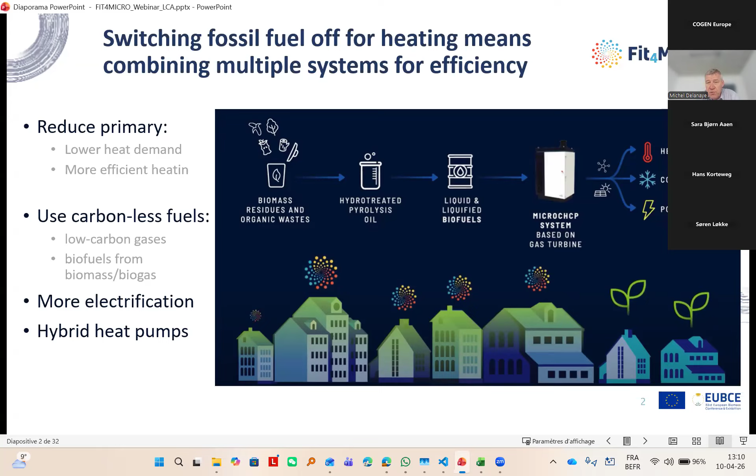And so with the micro CHP system, or CHCP, because it can also do cooling, we can do heating, we can do cooling, but we can also do power. And so that's how we want to greenify our buildings.

So the project started in 2022. It has been lasting for 48 months, so it's almost finished, closing in September this year. A budget of 5 million euro, and it's a research and innovation action, aggregating in the very beginning 9 partners, now 8 because one actually left. We are the coordinator, Mitis.

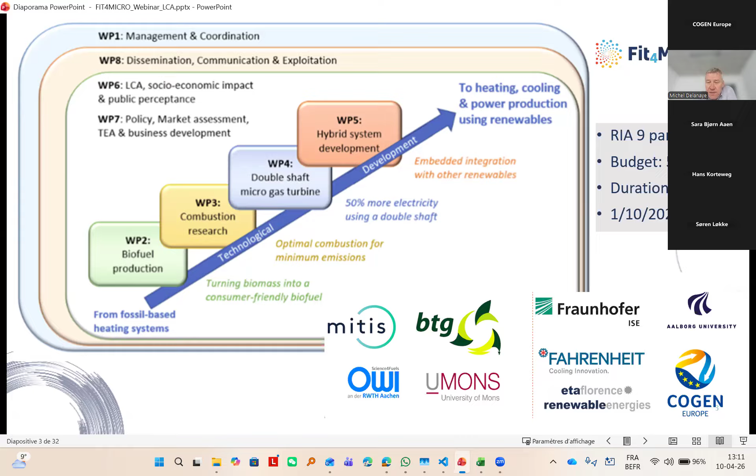We have other SMEs like BTG inside of the project. We have a large institute like Fraunhofer, universities like Aalborg University, University of Mons, and smaller research centers like OWI, which is affiliated to RWTH Aachen. Cogen Europe is part of the project as well, and ETA is taking care of dissemination of the project. So we have a structure which is relatively classical for European projects, where we have management and coordination, surrounded by dissemination, communication, and exploitation, and the activity today is part of this WP8.

We have technical work packages, and I will be mostly focusing on them today, from work package 2 to work package 5. And we have also life cycle analysis and the economic impact of the project, together with outlook in policy and market, and also what we can do actually to penetrate the market with this system.

If we go to the technical work packages, we have one focused on biofuel, one focused on very clean combustion, one which is more on the microgas turbine, and the rest is focusing more on a system level. I structured my presentation, which is highly technical, on 4 main innovations, or main developments we have carried out in the project.

So one of them is the development of a novel thermodynamic cycle for the microgas turbine, which combines intercooling, multi-combustion staging, and also humidification of the cycle. So I will talk about it.

We have a second innovation which is mostly focused on flameless combustion, which is a special combustion regime where we can achieve very low NOx, which is also a greenhouse gas, and which is very versatile in the sense of the capacity to burn different kinds of fuel. And it actually is quite interesting for burning this biofuel, which is also quite special.

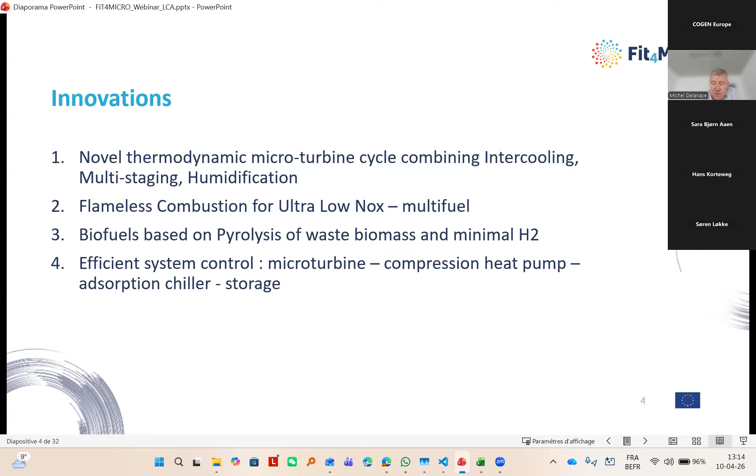And the last innovation is the coupling of our microgas turbine system together with heat pumps, vapor compression heat pump, but also adsorption chiller to broaden basically the usage of the microgas turbine, and storage, and to see what kind of building actually can be interesting for that kind of system. So my presentation will be focusing a little bit on the 4, giving you some synopsis without going into too much detail.

So before entering into these innovations, just have a look at what we are trying to achieve, which is this combined system. We are combining a gas turbine, which is this block called MGT. We always have some sort of backup boiler because it's sometimes difficult to meet the heat demand in very cold weather, which sometimes appears only a couple of days in the year. So this MGT and backup boiler will use the biofuel.

In the system, we also bring electricity coming from PVs in good weather. We, of course, can also be connected to the grid, or we could be off-grid. And we use the MGT to produce electricity. So this is where you have this purple line there, injected into the bus of the building. But also heat. Heat can be used for domestic hot water, and also for heating, obviously. That's why we can store it.

And the heat can be either directly provided to the building in order to do heating, but also, for example, to an adsorption chiller in the summer, or where we need cooling, in order to produce cooling from the heat. That obviously will broaden the range of application of the microgas turbine.

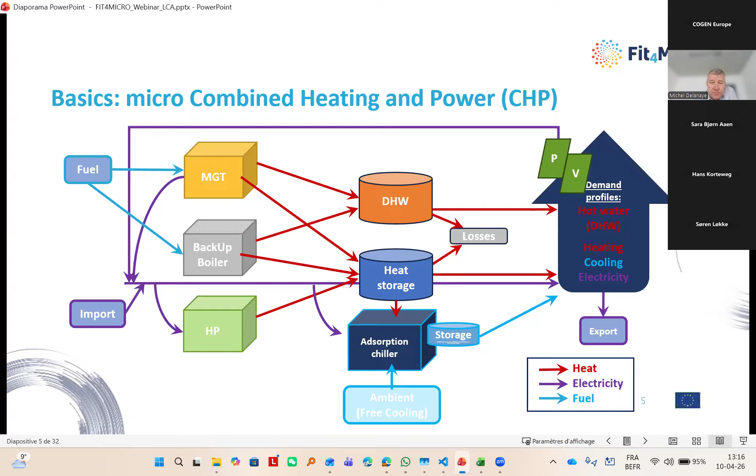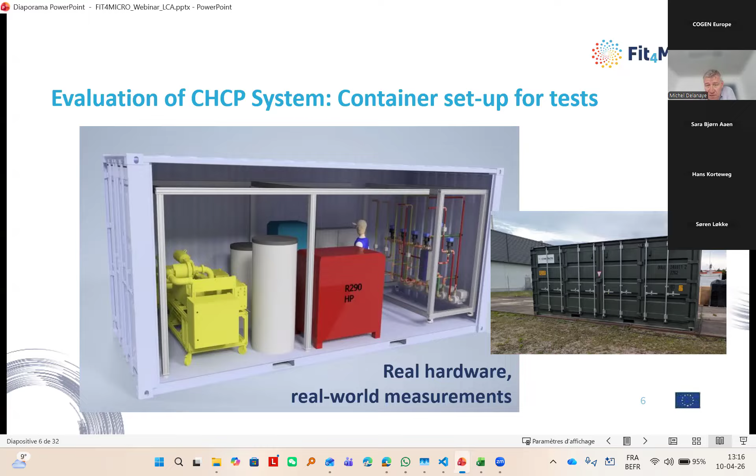So at the end of the project, we want to reach TRL5, and the TRL5 is basically a container, so that's not very nice because it's closed. But in that container, you have all the systems: the microgas turbine, heat storage, vapor compression, adsorption chiller, and the distribution of the different energy. And we will be testing this. It's going to be ready very soon, and everything will be tested together.

So let's focus on the first innovation, which is this novel thermodynamic cycle. A gas turbine is something which is quite nice from the CHP point of view. So that's a basic recuperated Brayton cycle.

We have electricity, let's say, in the range of 30% of efficiency. And all the heat basically can be withdrawn from the economizer here in the cycle after the recuperator to produce, let's say, the heat that will be used by the building one way or another, or by the adsorption chiller. And you can certainly reach at least 80% efficiency overall, even more, perhaps 90-95% efficiency, depending on the way we actually do it. So the microgas turbine has this advantage of relatively high output temperature. So it can be used indeed to produce hot water, could be used also for steam or for some other stuff.

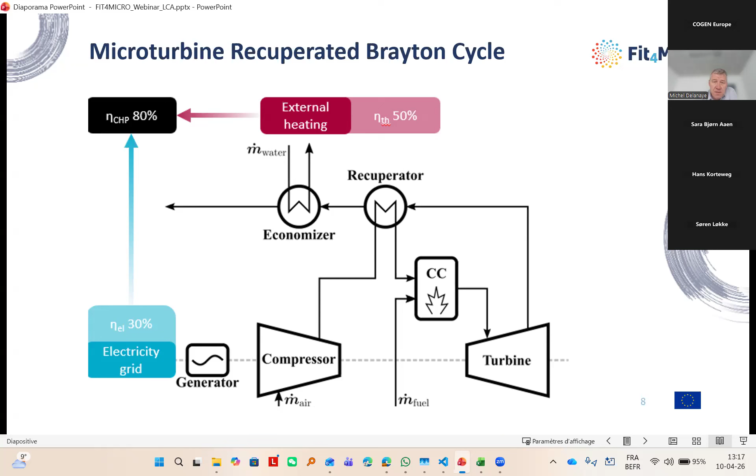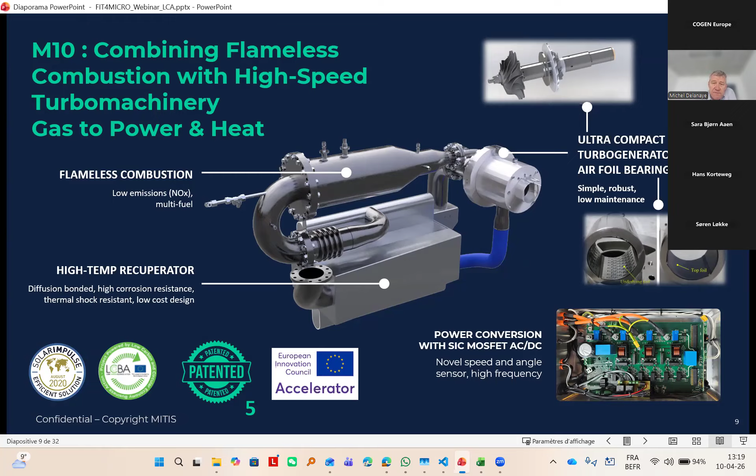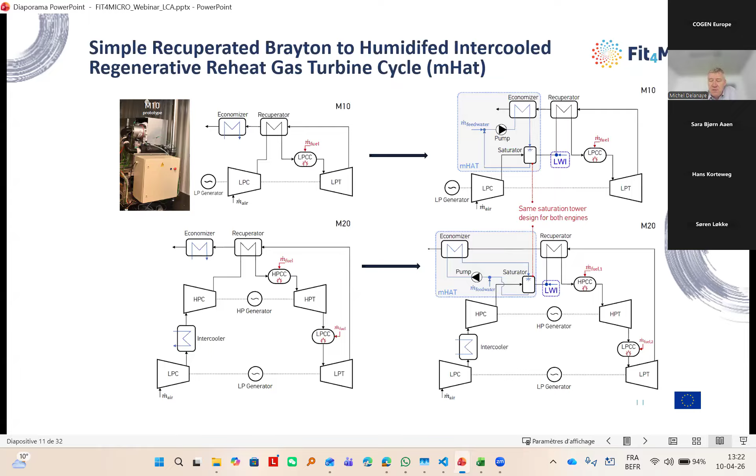So we can do it on the simple cycle, typically the M10 machine, or we can do it the same way on the Micro 20 machine here after the high pressure compression. And because you are at higher pressure, it's a little bit better, in fact. And that's what we saw in all the analysis that we have performed. If we take the M20, so this two-stage machine here, we can get an improvement of electrical efficiency which is significant, 8.4%. If we do direct injection, 6.5%.

And basically, with respect to the M10, we were 6%. So we are increasing from the M10 already the efficiency 6%. So you have 0.4 improvement and about 2.3% by using the micro HAT. The M10 is here, let's say it's the basics. If we do injection, we get a little bit more, and micro HAT, we get also 1.3% improvement of efficiency.

Initially, we were all focusing on the micro HAT because this is the best. But at the end, what we see is it's also very complicated to implement. So that's the saturation tower, which for a small machine, from a cost point of view, is probably quite difficult to, let's say, imagine. Direct injection of water is already interesting and can already allow a gain.

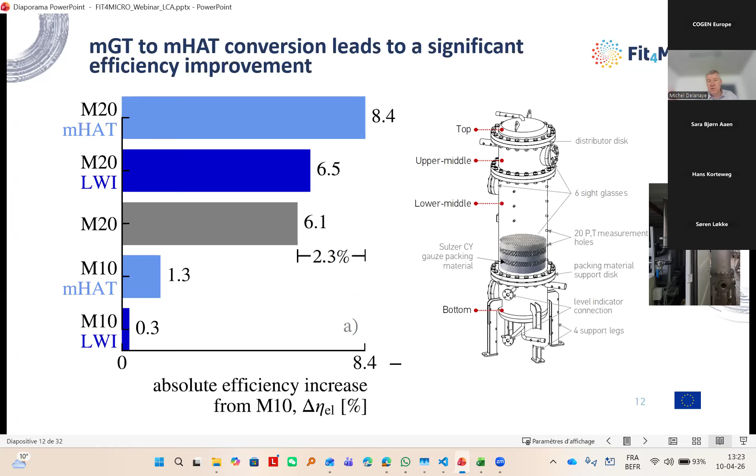So that's the improvement with respect to the basic single recuperated cycle. With this two-stage micro HAT humidified, you can get 8.4 improvement, which is typically from a 30% cycle of gas turbine, simple recuperated, you could get to 38%, which is really significant.

What about flameless combustion? That's our second big activity in the project. And what is it? Flameless combustion is quite interesting in terms of the name, because usually you think about combustion with a flame. And indeed, in conventional combustion, lean premix combustion for example, you would see a blue flame, which is produced by the radiating hydrocarbon radicals.

When you go to flameless, it's quite funny because at the end you don't see anything. And you think that your combustor is not burning, but it's still very much burning. But you are in a regime of combustion where basically your temperature has decreased significantly. Your temperature decreases, your combustion efficiency increases, and your pollutants are decreasing.

So you think it's the miracle combustor. True, in some way it's a miracle. It has also its drawbacks. For example, it's quite big because you need heavy recirculation of the flue gas inside the combustor.

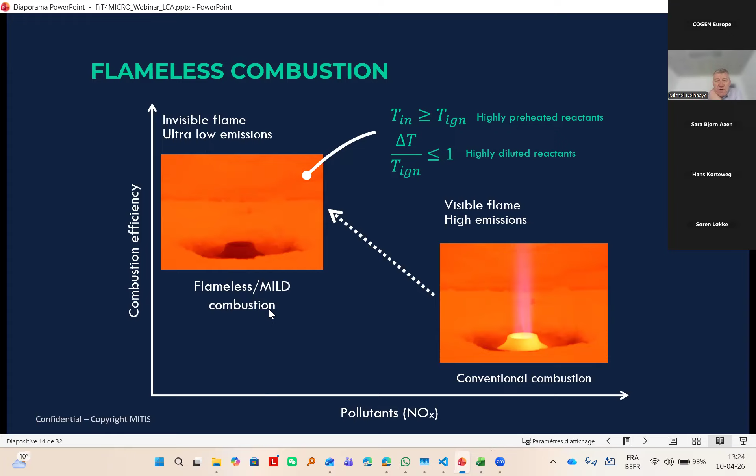The MITIS flameless combustor looks like this. If you would have a lean premix combustor, it would be half of the size. Here it's a bigger size, but it has this advantage of very low NOx and also the capacity of burning everything. So in this combustor, we are injecting gas, or fuel, in the middle here. If it's liquid fuel, you have an atomizer.

And then air is injected through this injector here. We inject with a certain speed in such a way that we have high recirculation of the flow. We basically detach the flame. There's no flame; combustion takes place here. And thanks to the big recirculation, we have self-ignition of the mixture, and then it goes out like this, remixes, and goes to the turbine.

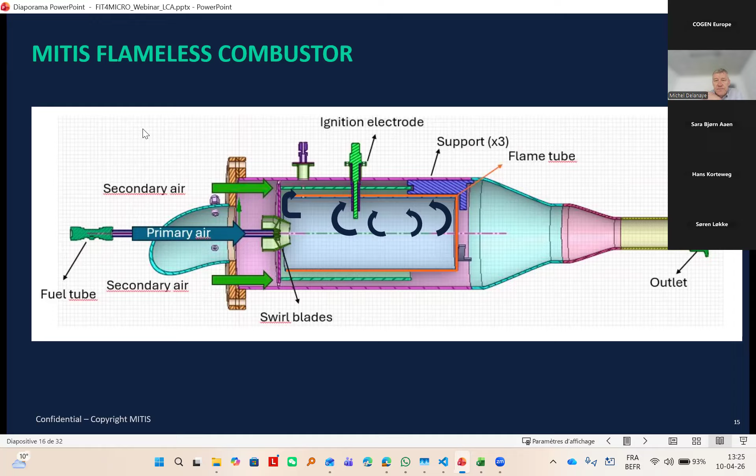So that's a little snapshot. We do a lot of simulation of this. That's a basic axisymmetric simulation where you can see the temperature in the back of the combustor, the flame tube, where we have also the OH radicals. OH radicals are a very good marker of where the combustion is taking place. If you had a flame, you would see OH here.

No flame, you have OH in this region, and the temperature of the mixture here is no more than 1400 degrees C. Whereas if you have a lean premix, for example, you will reach 2200 degrees C in the flame, and then you will have onset of NOx.

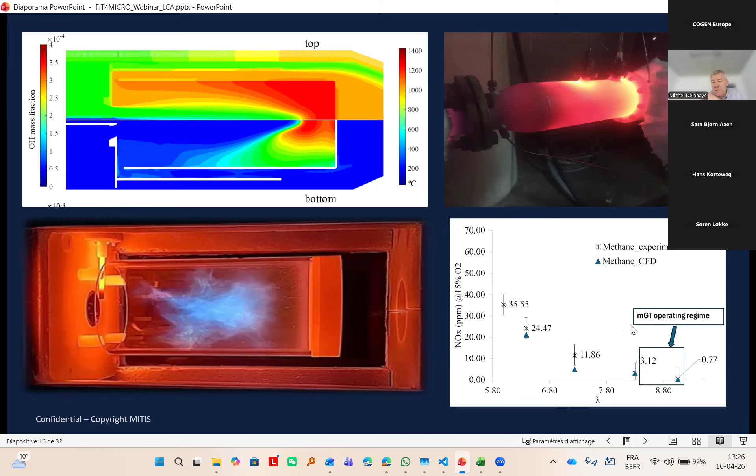That's a CFD simulation, for example, of methane combustion compared to experiments, and we can go as low as 3 ppm or even lower in the regime where the combustor is operating. So we have been working on this flameless combustor and improving it for biofuel. Biofuels which are made using pyrolysis of residues and minimal ingress of hydrogen.

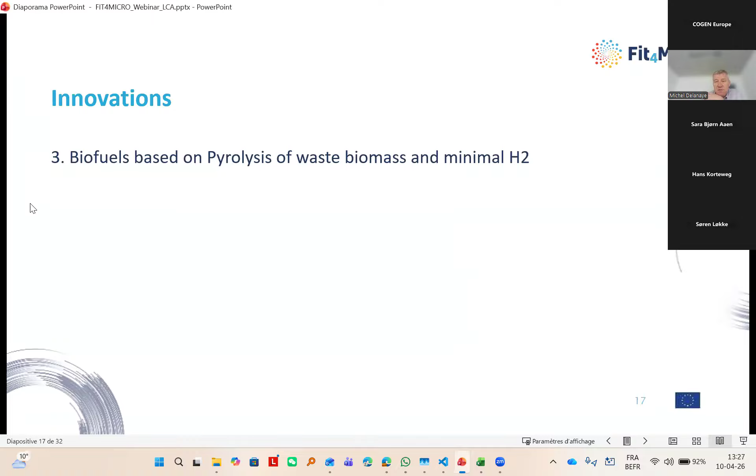Just to give a word, this is developed by a company called BTG. The principle is that you have biomass coming into a reactor where you have very hot sand, producing gas. Gas is condensed. Some of the flue gas is used to burn and create the heat for the reactor to work. Yeah, I have an animation here.

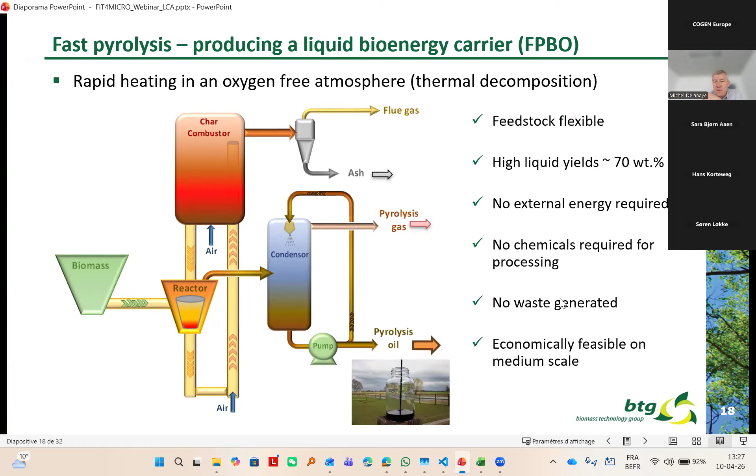And then we get the pyrolysis gas and pyrolysis oil. The pyrolysis oil is some sort of a syrup which still contains a lot of oxygen. So it's not very stable, but it contains most of the energy from the original biomass. This process can reach about 70% of all the energy that you had initially in your residues.

So that's how it looks like, this fast pyrolysis bio oil called FPBO. It has a relatively low LHV, so 16 megajoule per kilo compared to natural gas, which is 50 megajoule per kilo, something like this. You have also some residues and so on that you don't really like.

And usually what they do, they take it directly to the refineries. Actually, they mix it with crude oil and then they make the product. But we can make something else out of it.

So we can improve it by hydrotreatment, which means we inject hydrogen, remove oxygen, stabilize it, and at the end you get an LHV which is at the end of the range of 40 megajoule per kilo. And let's say your residues that you have inside now are very, very low.

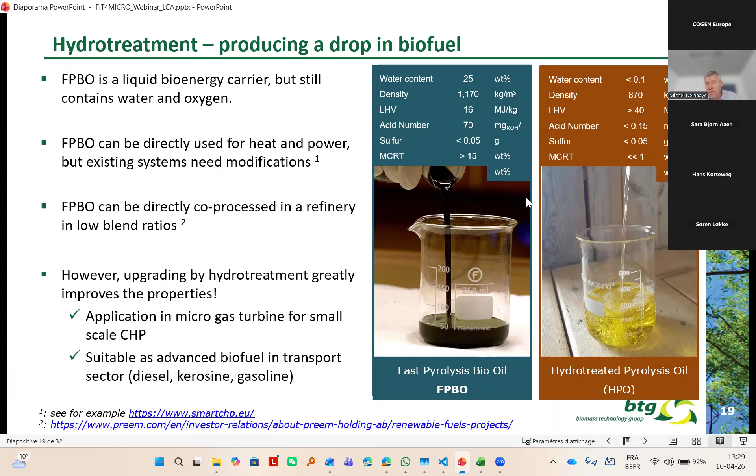So that is already some sort of fuel you can use. Usually from this they could directly create biodiesel, biokerosene, or biogasoline. In the project, the idea is to use this HPO with the least amount of hydrogen, because hydrogen is very costly. So the cost of your fuel will become higher if you use more hydrogen.

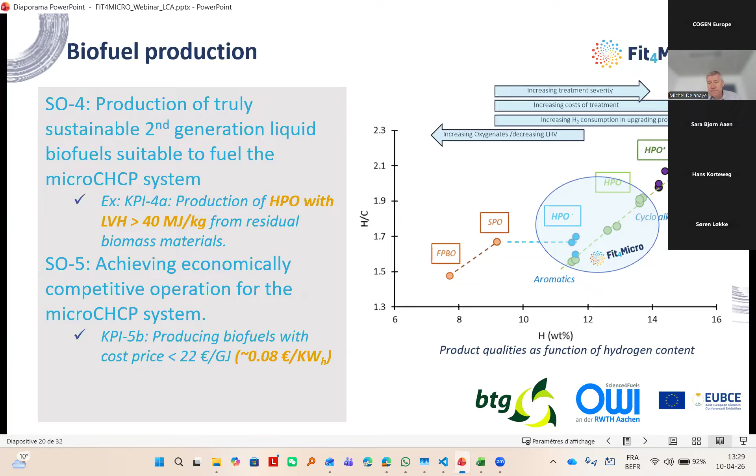And CO2 and O2 and CO in general is a little bit more difficult to predict. So simulation under-predicts, let's say, or gives too much CO compared to what we have in experiments. But actually pyrolysis oil burns very well into our combustor without quasi no modifications to the combustor.

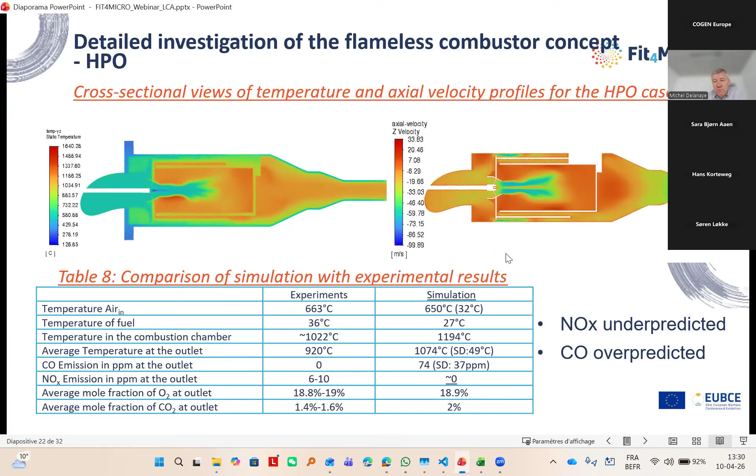So OWI has been installing, I would say, a sophisticated test bench to test the high pressure combustor, because when we go to higher pressure, 7 bar into the cycle, that's something which is a bit unknown to us.

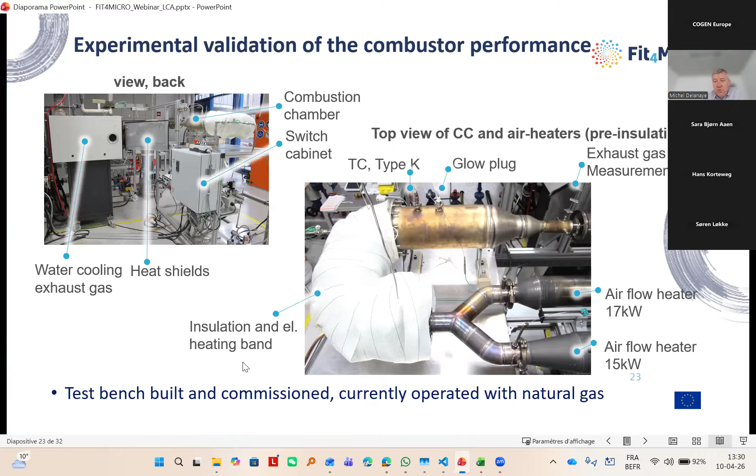Quasi independently of the grade of HPO. And so the grade means more hydrogen, more treatment, or more cost for the HPO. The combustor is actually behaving very well, reaching low NOx, burning, no problem.

And compared to domestic heating oil, which is a little bit our reference, which is the black one, it's actually working even better than domestic heating oil. So it means after all these campaigns of testing and so on, we are very confident that we can use liquid biofuel directly into our flameless combustor, the low pressure one and the high pressure one as well.

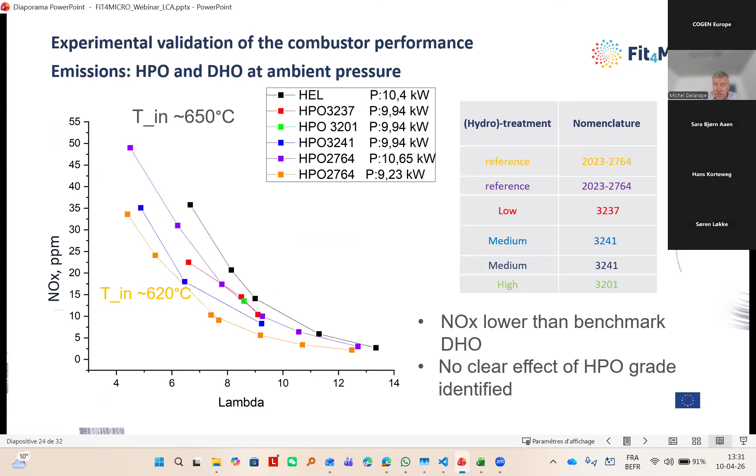Now, the rest of the project was focused on combining everything together. So combining compression, vapor compression heat pump, adsorption chiller, storage, the micro turbine. First of all, look at, okay, where can we apply it? What kind of building? And then afterwards also to control it. How can we optimize the system?

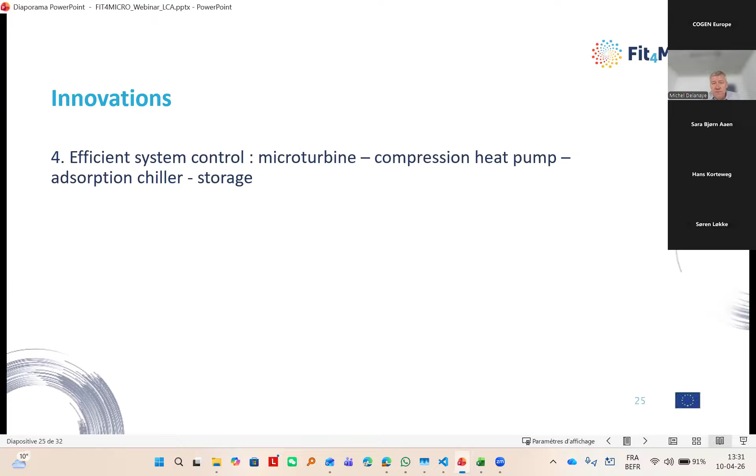So Fraunhofer has been developing an Excel sheet. One first thing was called a static calculation, which is an Excel sheet which contains all the thermodynamics of the different components, and where we can simulate on an hour basis, basically how much electricity is produced, how much heat can be taken or consumed by the building, etc. So optimizing the whole system.

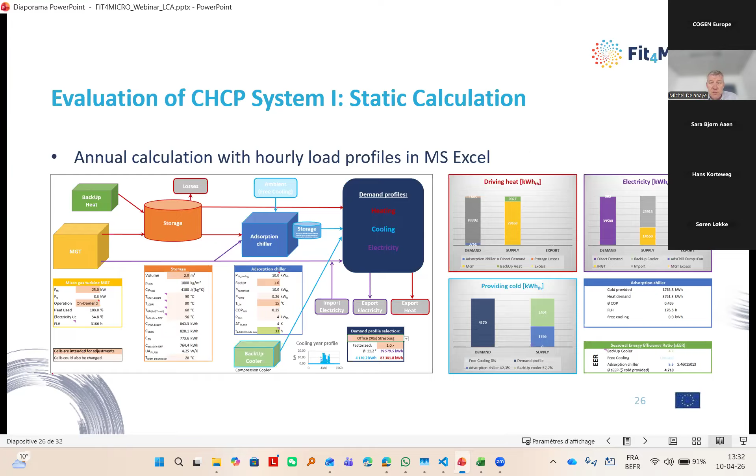And at the end, you get nice graphics actually, which show you how many hours basically your micro gas turbine will operate, because there's no point buying a gas turbine if at the end actually it doesn't run. So that's the basic thing.

So one of the applications, for example, was an SME in an industry building, where they actually need some cooling. So they use adsorption chillers, but at the same time, they also need the heating of the building and the domestic hot water. And it's located in the north because there, I mean, you need some heating. So they compare different combinations.

So that's our machine, the combined heat and cooling power machine, together with a small compression chiller in order to have some backup in case there is a problem, and free cooling modes, compared to the usual practice, which is a compression chiller alone.

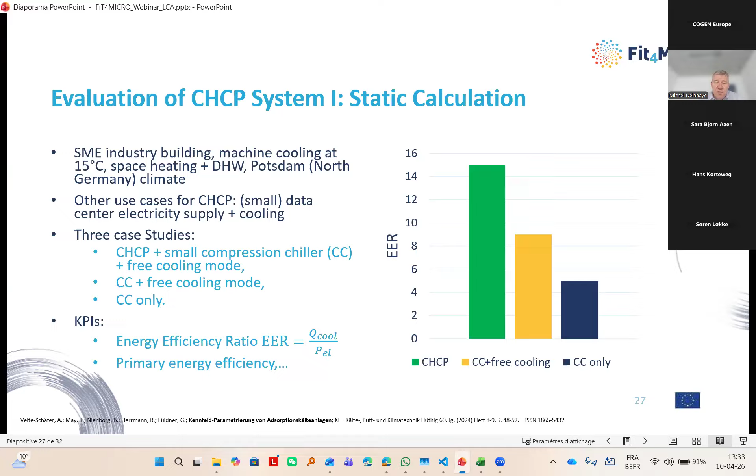And so the idea is to look at energy efficiency, which is basically how much cooling is produced with respect to how much electricity. And you can see, for example, by running this Excel sheet, we can see that we can in fact be very good in terms of primary energy consumption.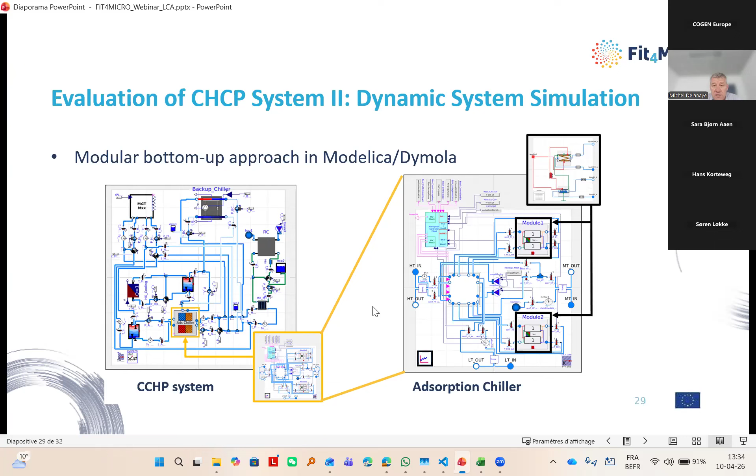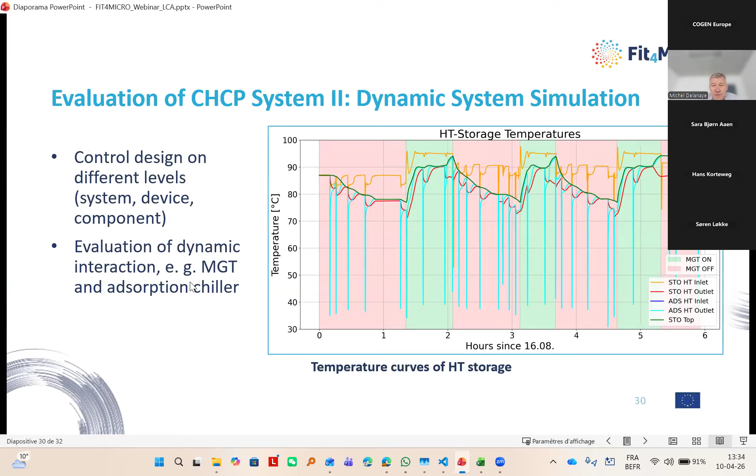Another modeling we are doing is a full dynamic system simulation. With Dymola Modelica, we're actually simulating the whole system and its dynamics. For example, the adsorption chiller is represented by a sub-Dymola model, and the MGT also has its own Modelica system. So we can simulate completely in a much more transient and detailed way, and instead of going by day, now we go by hour, or even lower. We can simulate the system and see its applicability to a particular dynamic supply of energy.

In conclusion, we are reaching the final line of our project. We had very good, very interesting interaction between the consortium members and partners, with a lot of good collaborations. We were able to improve the fast pyrolysis process to use low-grade materials and residues, which is very important to decrease the cost and to minimize the amount of hydrogen used.

We demonstrated flameless combustion with very low NOx for the hydrotreated pyrolysis oil biofuels. We implemented the novel cycle with airfoil bearings, microgas turbine, and flameless combustion with humidification as well, and did all the coupling. We also improved adsorption chillers—Fraunhofer has been working on this. Now we have a complete combination of all the systems together that we are able to control using efficient transient models. Thank you very much for your attention.

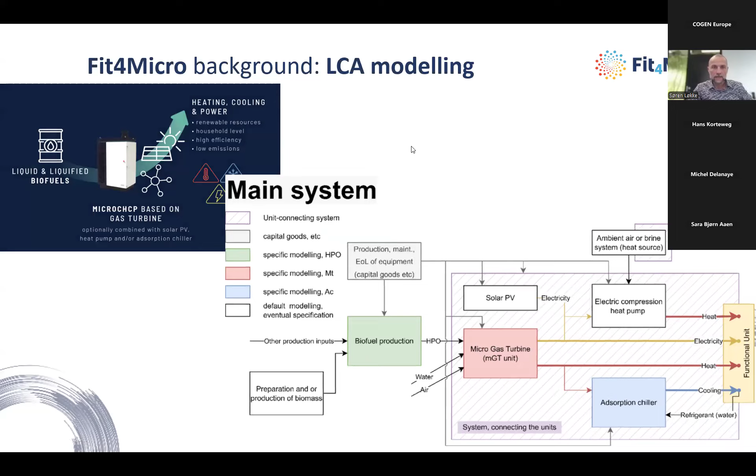So basically, what Michel has been presenting is what we are putting into the life cycle modeling. What we have here is the main system that we are modeling: the biofuel production down here, the actual technology system with the microgas turbine, the adsorption chiller, and the different outputs in the combined system here. So this is what we are modeling in the system.

In terms of the feedstocks, what we present here are three feedstock scenarios: forest residues, contaminated wood, and wheat straws, as different types of waste biomass resources that can be put into the biofuel production.

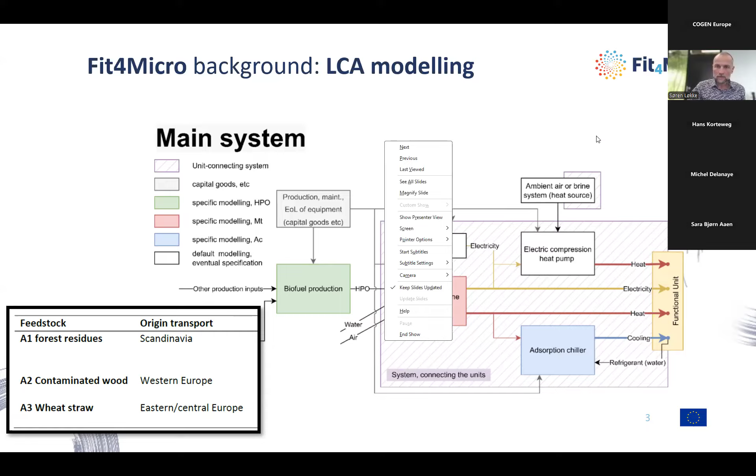And then, based on the work from Fraunhofer, we are putting this technology system into different specific geographical and building use-case-wise use contexts. This is pretty important because one might think that the environmental performance of a system like this integrated microgas turbine system works the same way everywhere, and of course it does in some sense, but its environmental performance depends very much on these contextual factors—how or where the system is being integrated. This is extremely central.

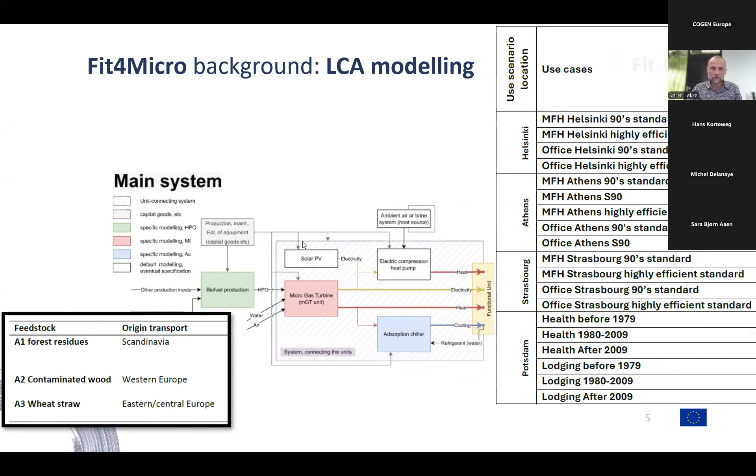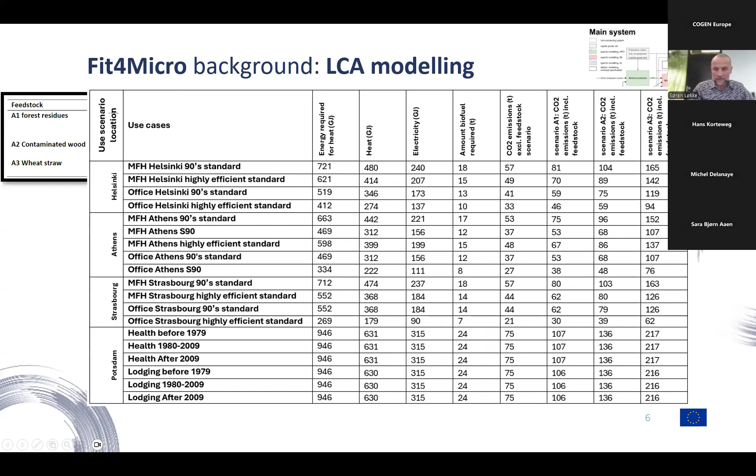When we take a Scandinavian system background like Helsinki, or a Northern European one like Potsdam, we can see that emissions may be slightly higher compared to a system where we're looking into a Southern European context. The main point we can take from this is that the choice of feedstock can be very decisive.

When we compare the microgas turbine system's climate performance with alternative performance, we find that forest residues, and especially contaminated wood, can achieve net negative emission profiles, while other resources, even though they might be quite competitive to a default fossil fuel-based energy supply to housing, may still contribute a net positive emission profile. So the system context matters a lot.

We've been able to extract and show this clearly using a consequential life cycle assessment methodology, where we're not only looking into the combustion emissions, but also very much into the alternative feedstock uses and substitution effects. This means, for instance, that if you're using a bio-based feedstock, the alternative would be fed into local district heating supply, and the alternative heating supply that the taking of the biomass induces could be coal-based. Then using this bio-based feedstock locally might be quite problematic.

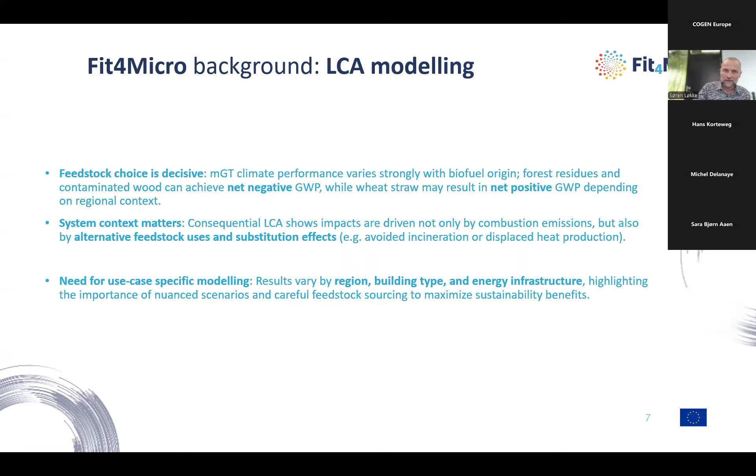Thanks. I'm looking forward to hearing the questions that I guess will arise.

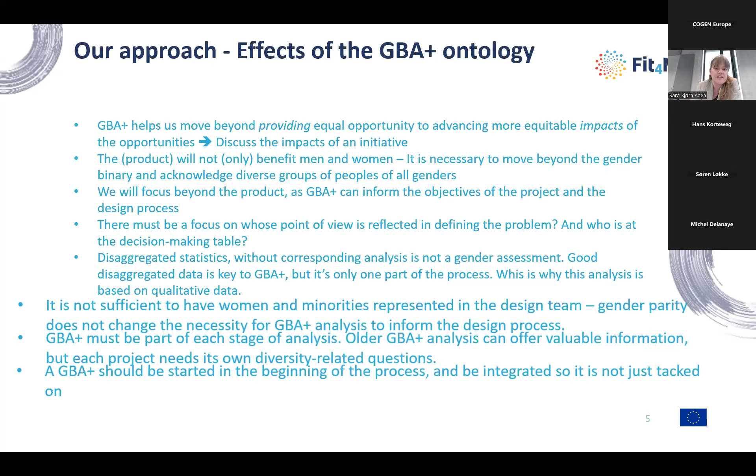And that was a very interesting workshop we had in Liège a couple of years ago, where I listed a long list of questions for the participants. And they could pick whatever they found useful and relevant related to the different stages of the design process, and related to different elements of understanding gender attentions. So I'm going to present to you now the most important results from these discussions. So this is related to the very specific technology that we are talking about today.

So one that was pointed out by the participants is that related to the form and function and service experience, so the very inner core of the technology, something that should and could be considered is the noise levels of the technology. What we know is that when we talk about gender plus, specifically age in this particular instance, we perceive and experience noise very differently. So young children and children in general experience noise more severely than adults do. Maybe intuitively it makes sense because they have better hearing.

So noise level is something that's considered, and maybe an effect of that, or a solution, it was discussed that we need flexibility when it comes to shielding for noise according to where it's implemented. Here you could have implementation in a kindergarten versus a regular residential building or school or wherever.

Another element that we discussed was the temperature. And this is also a case of needing flexibility. What we know from research is that men and women experience comfort temperatures, or temperature in general, differently. So we have different comfort temperatures. Women have higher comfort temperatures compared to men.

And the effect of that is that in the summertime, especially where you use the cooling element of the technology, women will feel it colder than men. So this is also a case where we need flexibility in temperature levels, and we need to be able to make different solutions for different users.

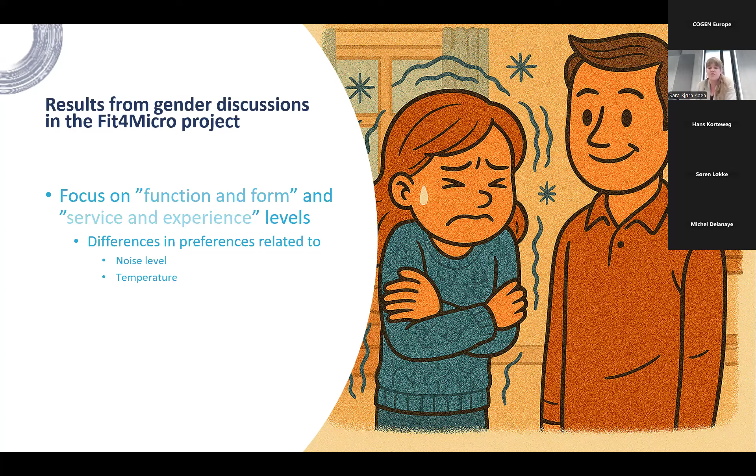Then our fourth one is that we see risk perceptions related to use of new technology, in this case the HPO biofuel, are different according to age. So the older you get, the higher you perceive risk compared to younger people. So this is not relevant in the specific design process, but it is relevant when you are communicating about how to implement this technology. You need to cater to risk perceptions by different recipients.

So throughout these discussions related to function and form and service and experience of the technology, what we landed on at a general level is that you need to understand diversity and you need to be flexible, particularly when implementing this technology, in order to make it inclusive for different genders and social categories. And of course, implementation speaks back to the development of the technology. So you can't implement something flexibly if it's not flexible at the onset. So that's why it's relevant for the design process as well.

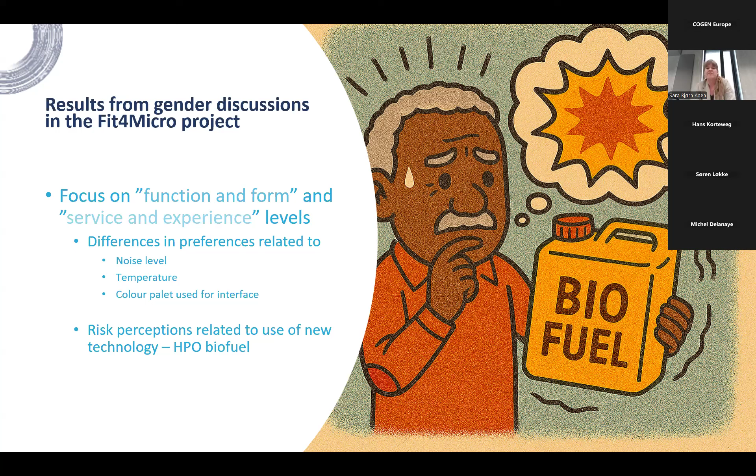Further results from the discussions with the consortium were related to an outer layer of the system, related to systems and infrastructures. And here a result that we discussed was that the weight of spare parts, for example, or the refueling elements, canisters or whatever you use to refuel, can create barriers for maintenance personnel who are slightly built, or disabled persons.

When you assemble or service or change, you need different spare parts for the micro engine, so how big can you make them? And are you creating barriers for people to service this technology if you make them too big? This could be something to consider. The second one is that communication and marketing is important when catering to different ways of thinking.

So what we see, and I'll return to this at a later point, is that men in particular are more prevalent when taking energy-related decisions or energy technology-related decisions, and women are less so. So that's a question of how you market. If you market this in the usual way, then what we will see, I expect, is that it will be men taking decisions related to whether or not to implement or buy this kind of technologies. So how can that be addressed in the way you communicate and market this technology as a way to level out the decision-making participation across the genders?

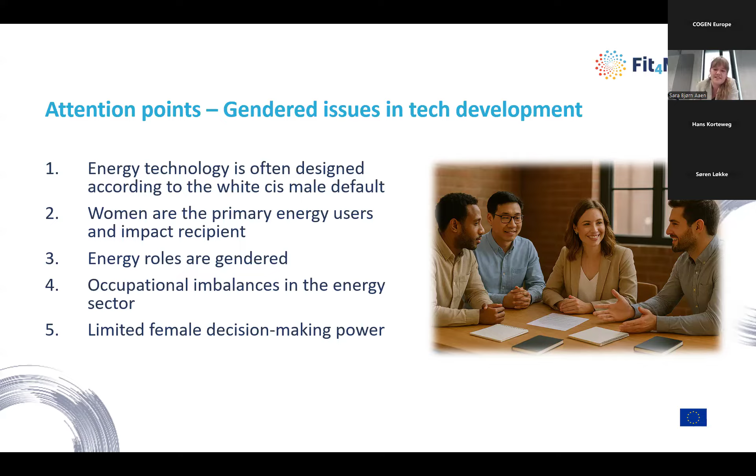What we also see here is that on a community level, we see less participation from ethnic minorities and religious minorities. And reasons for that are that we use the wrong communication channels, for example. So we don't reach the people that we need to reach. So if you participate in a meeting related to energy communities on a local community level, you will most of the time find men over the age of 50. And that's it. So here we have a challenge as well, but it is of course on the outer layer of the system understanding, a little bit moved away from the specific technology.

Okay. So concluding on these findings related to gender attention points: first of all, research and development people, which are my very good colleagues in this consortium, will typically focus on the inner layers of the technology. So it is the design process that is focused. If you see in the bottom corner here, function and form is something that you can relate to when you're working with technology development. Experience and services is something you have to consider because you need to implement it somewhere.

And then it becomes a little bit fuzzy when it comes to systems and infrastructure and paradigms and purpose of the technology. So we did not cover that very much in the workshop, and it's very understandable. So my point is just that the design process is not the only place you can tackle gendered issues. You need to move out and tackle these issues elsewhere, with policy makers and governmental institutions and so on. We need regulations to cover these issues. So the second point is that a gender plus analysis will improve a product.

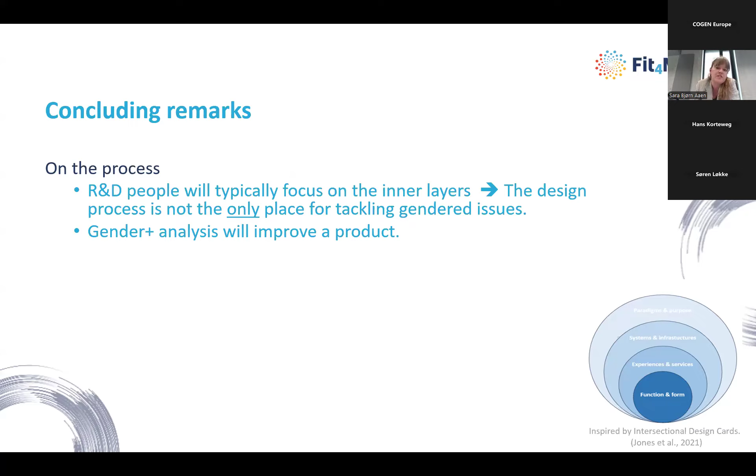So it's not only something that we put on in order to make it more diverse and to make it more inclusive for the rest of the society, but it would also make a product better because it creates a more flexible approach to understanding the performance of a technology.

Third one, we lack knowledge and interdisciplinarity in research and development processes and academia, just to speak from my own experience. We simply don't know how to tackle these issues. I was positively surprised by the workshop that we did in the consortium compared to the discussions I've had with practitioners elsewhere. A lot of people just give up because it's not their area of expertise, and it's difficult, and it's inconcrete and it's complex, so it's difficult to discuss. So we need to include people who are able to discuss these kind of issues in design processes. So interdisciplinarity is rather important to include these aspects more efficiently.

And this is one of my, in Danish you call it smertensbarn, I don't know the English term, but it's one of regrets, I'd call it, that we lack disaggregated data. So it's difficult actually to understand differentiated impacts on different social groups. Doing a gender plus impact assessment is difficult because we simply don't have the disaggregated data. We have men and women, mostly, often, but apart from that, it becomes very difficult. So now I've started to see that we have included a third gender, for example, but this is just baby steps. So when trying to understand impacts on social categories, we need to disaggregate a lot more.

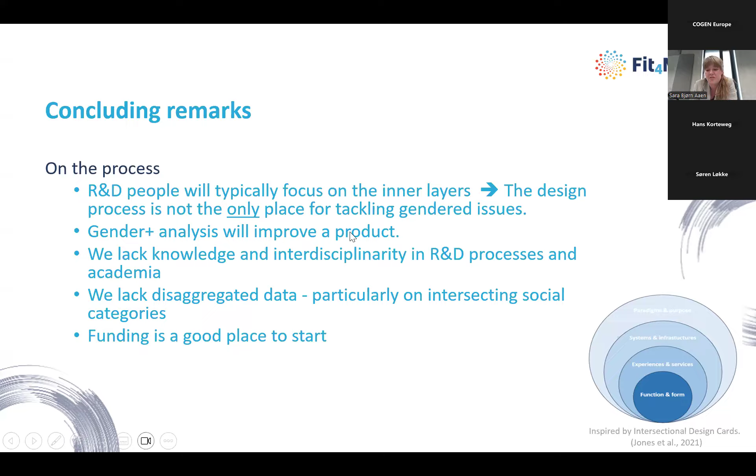And last point, funding is a very good place to start. I think it's very nice that we have started to be included in technology development processes, which is new for me. And this is very much due to funding efforts from EU and other funding agents. So this is a very good start because awareness is the first step of addressing issues related to gender plus.